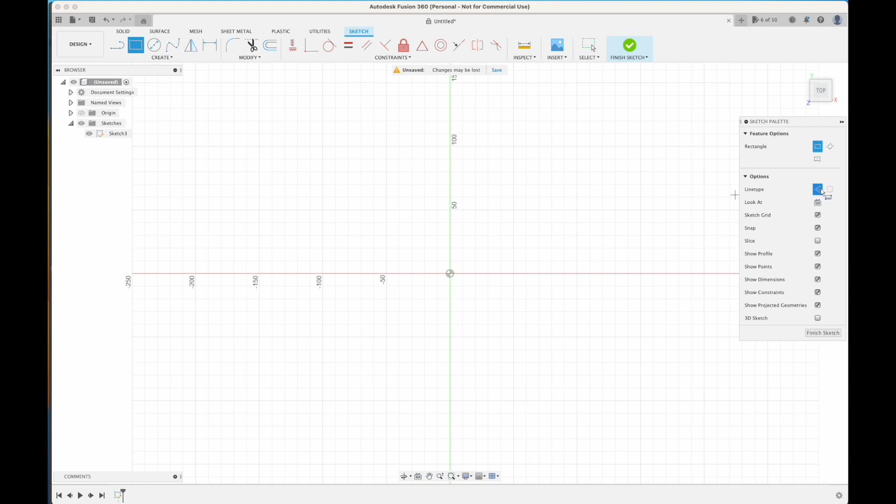Let's go ahead and start with a sketch, which you can create in the upper left corner. The way I generally start these out is I will create a rectangle on my canvas using a construction line, which means it's for reference only, and I will denote my build volume, which is 250 by 250 for a Bambu, and finish sketch. So I'm going to use this as a guide. This is going to be very helpful in a moment.

Next, I'm going to create a component. So we're going to go to Assemble, New Component. The reason to get into the habit of using components is it creates individual timelines and collections of bodies. So if you're creating assemblies, you would create multiple components, and in multiple components you can have multiple bodies and timelines, and it makes your organization a lot easier.

So let's call this N64. And you'll notice that the little radio button automatically switched to this N64:1. It adds that :1 automatically. And you'll notice that original sketch got a little opaque, and that's Fusion's way of telling us we're not working within that space right now, we're working within the N64 space.

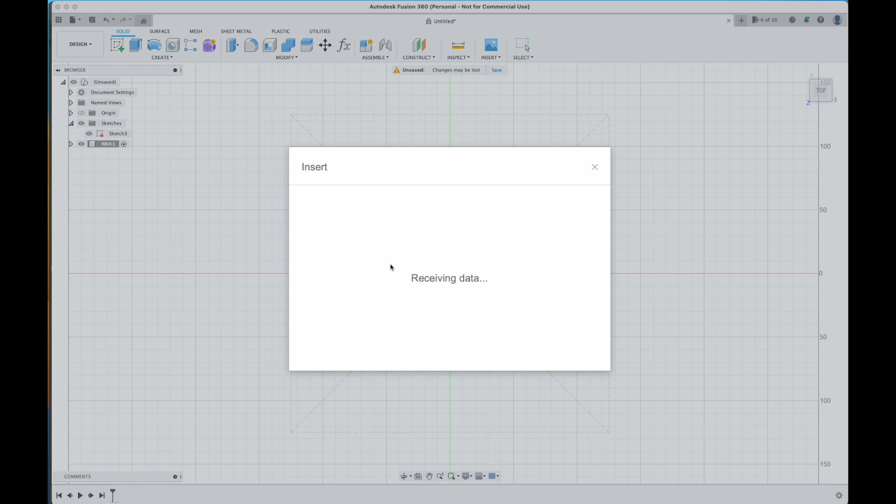Next, let's go Insert, SVG, Insert from Computer, Desktop. There's my SVG. It's going to ask me what plane. We want it on the top. And it's really big, and this is just because of the scale, I think it was in Adobe Illustrator. So what we're going to do here is kind of eyeball this. This is not an exact science.

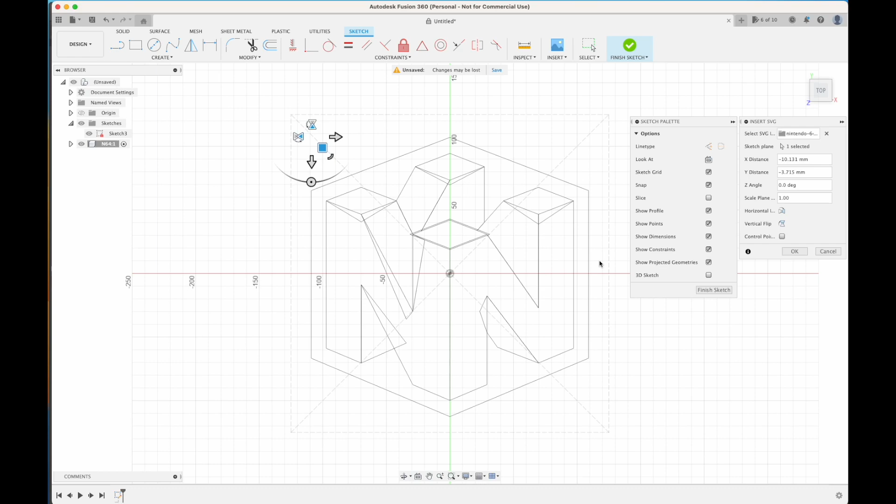What we do want to make sure of is we give adequate space around the edges for the brim, because this is a big flat object. Your slicer is going to add a brim to this. So I'm going to leave some ample space on the sides here, assuming that it's going to add a 5 to maybe even 10 millimeter width brim. Okay, so we're going to say okay, and now here's our sketch.

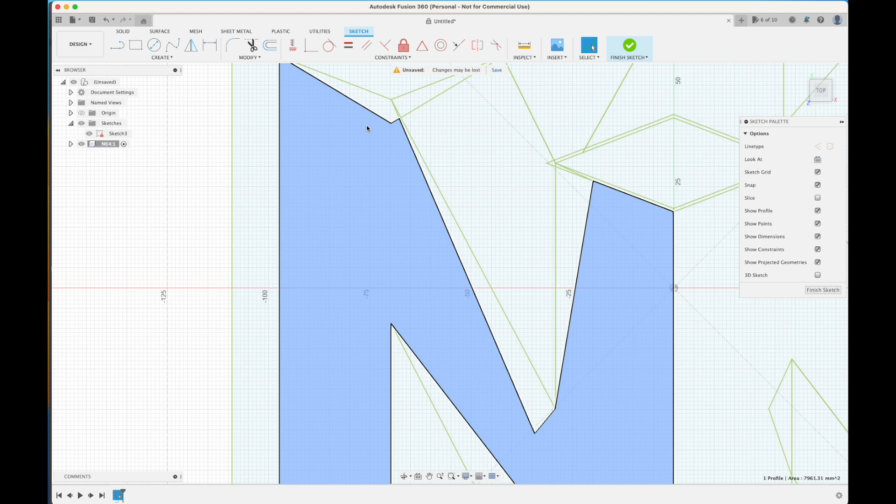Now we can start extruding these bodies. The way I generally do this is extrude the bodies based on color, and that can help us when we bring it all out and then bring it back into our slicer. So let's do the green stuff first. So here you can see how the lines are a little funky looking, and that's because I wanted to ensure that we have overlap with the surrounding objects, and you know there's going to be some weird things like this. We got to zoom in and get that.

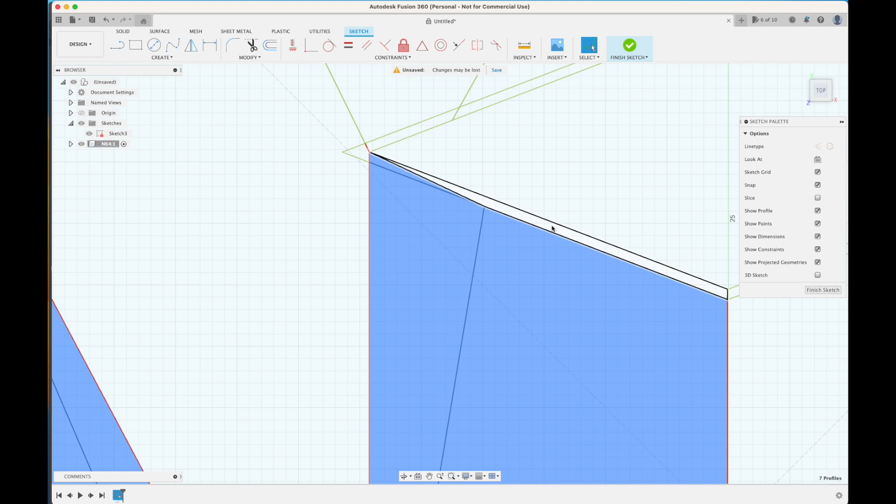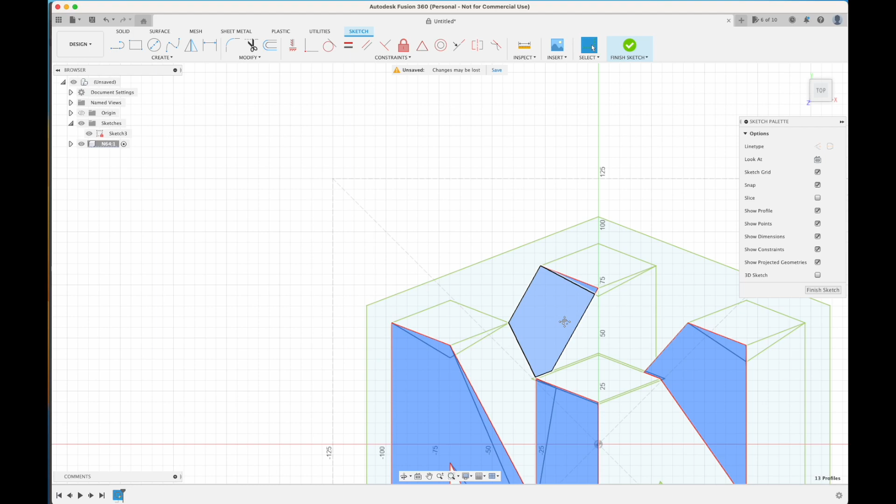Let's go like this, and we're going to get all of these pieces. Okay, that's one part of the, I guess we're going green. Sorry, not blue, we're going green. Just going to go with the flow here. Got that piece, and let's see, the last one is this kind of little ramp guy right there. Yep, okay. Make sure we got it all the way down here.

Now I'd like to preface this with, again, if this logo was constructed really well, I wouldn't have had to do these weird manipulations to it in Illustrator, but I didn't want to rebuild it because it's a pretty complicated logo. But this is how we can be scrappy and still get away with something.

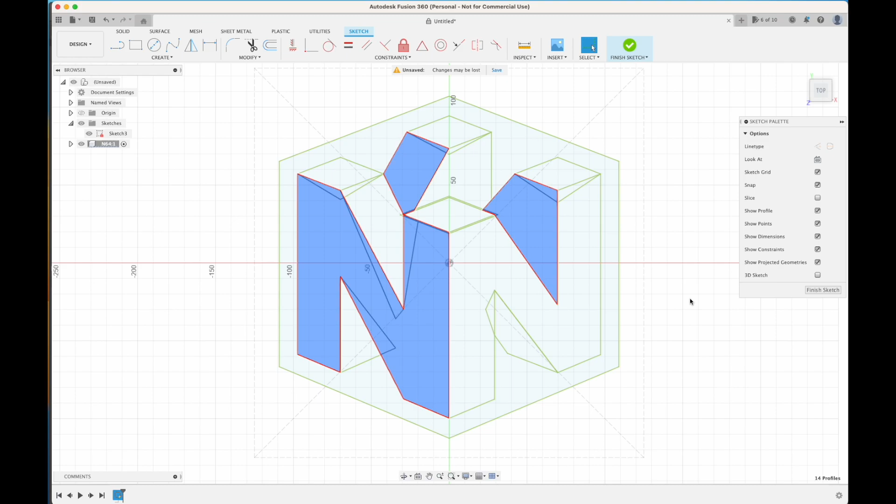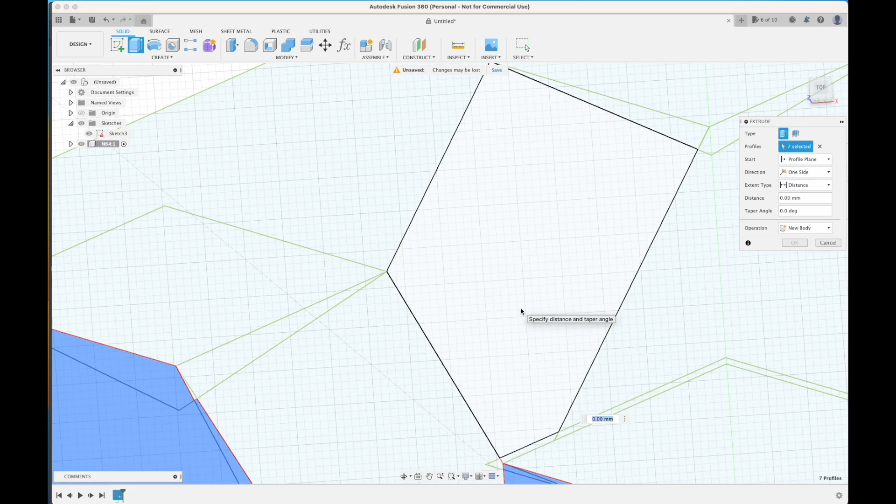Oh, and I noticed I'm still in sketch mode. Let's see here. If I hit E key, yeah, that's what I thought. Okay. I was in sketch mode and I needed to get out of sketch mode. So I got to do this again. Back where we are, I got the selection back again. Sorry about that. Now I already hit the E for extrude, and we're going to go 0.8. So we're going to give this a width of 0.8 millimeters.

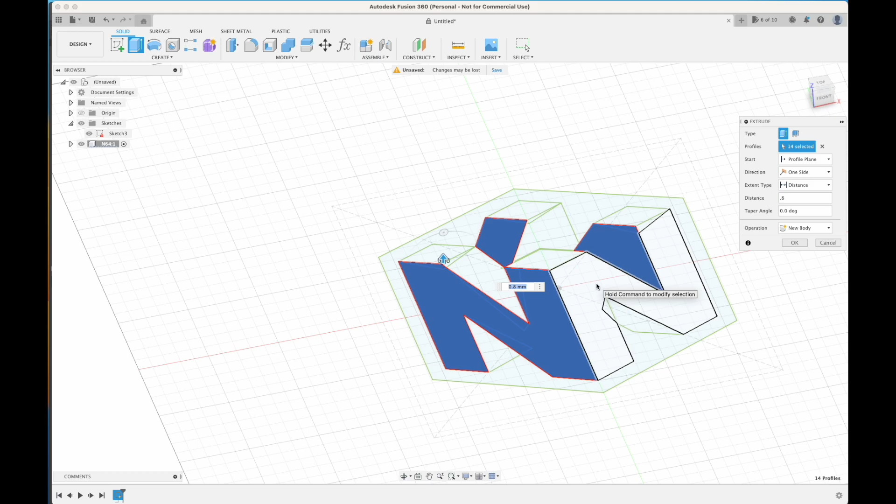You might be asking, why 0.8? What's the significance of 0.8? I have found that 0.8 is a good happy medium for diffusing LED light through normal filament, meaning not transparent filament or translucent, but normal, like opaque, if you will, filament.

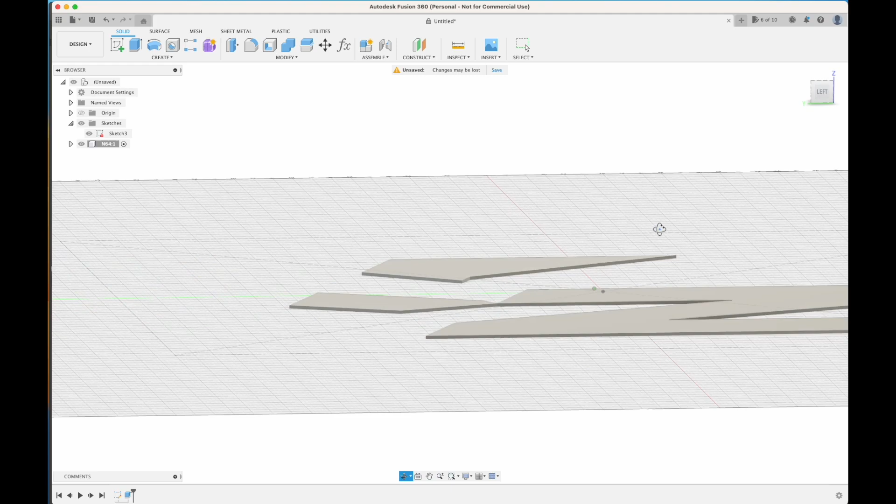Now, where the real craft comes in is depending on the color of the filament, you might want to do different thicknesses. For example, a normal royal blue will let a lot less light through, royal meaning this, than yellow. Yellow lets a lot more light through.

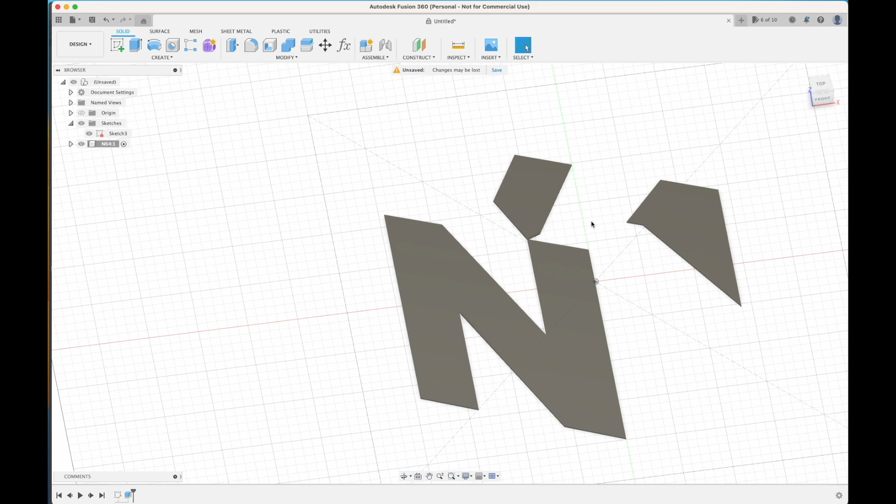So if we go 0.8 on yellow, we would only want to go like 0.6 on the blue and the green and probably the red because they're about similar color values. And that's how you can end up with really even lighting with different colors. And I'll show you a little trick here we can kind of mess with in Fusion to help that.

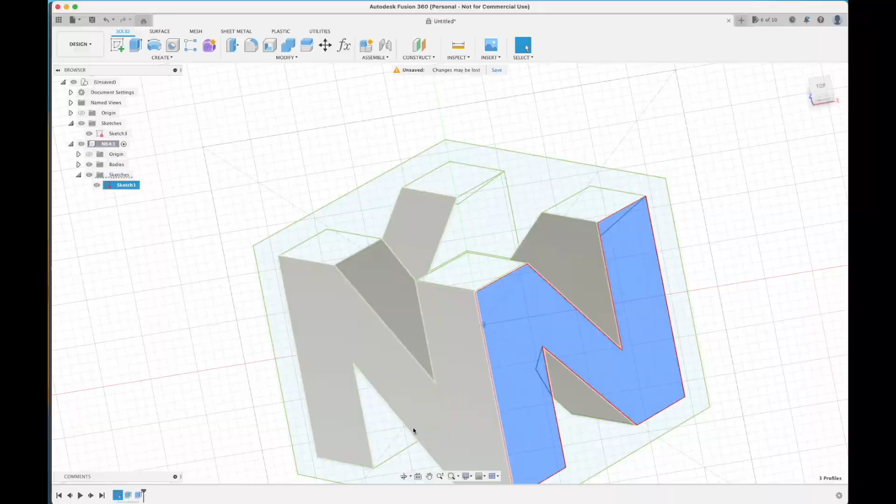All right, it turned our sketch off, which Fusion just does. And now I'm going to rinse and repeat, where I'm going to go select the colors and I'm going to extrude them so that we end up with our individual bodies inside of Fusion. Okay, so we've got all of our bodies. Now we could pause here for a moment and we could do some organization.

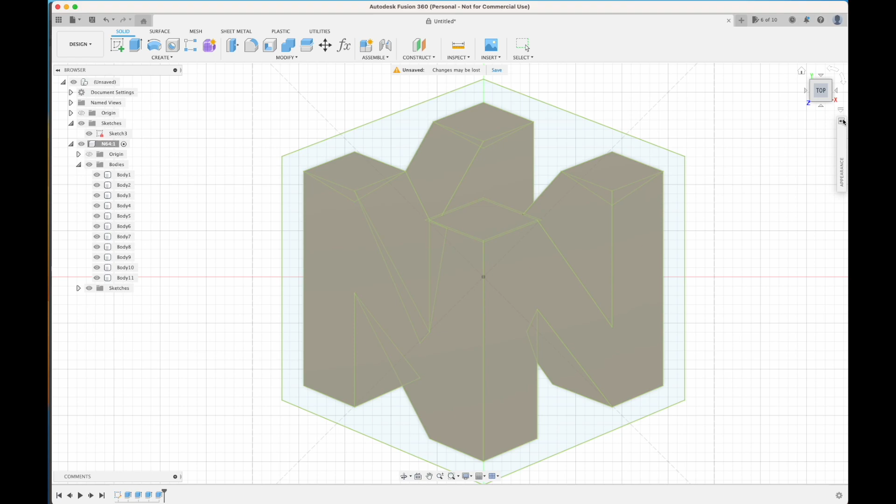And one of the things that also helps here a lot is to colorize this. You can hit the A key and bring up appearance, go down to plastic, and just drag a color over. Double click that color, and in this case I believe that is blue. So we'll change this to a royal blue right there. And let's drag that to the other blue faces, which is that one and this one. Right click to duplicate, change it to red. And let's drag this to the red ones.

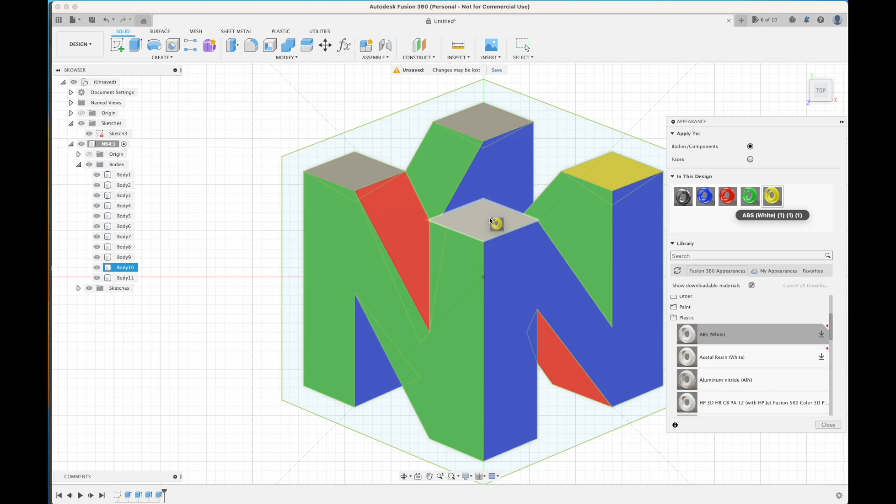Great, right click, duplicate, green. It's totally not the right green, but that's easy to fix. Let's go move this around like there, okay? And right click, duplicate, yellow. Let's move it over to yellow. Done. Let's drag it onto our tops here. Cool. All right, A key to hide. Actually, sorry, there you go.

Okay, so that's helpful. And if you want to as well, you could go over here to bodies, right click, and say new group, and you could say something like green. And this will help you further organize your bodies. This will also help us when we go to export, because we want to export the colors together. It's just going to be a lot easier for us when we come into the slicer. So I'm going to do the fast forward mode here, and I'm going to organize these things.

All right, welcome back. So we got our folders here. We've got green, blue, yellow, and red. And we can toggle these on and off.

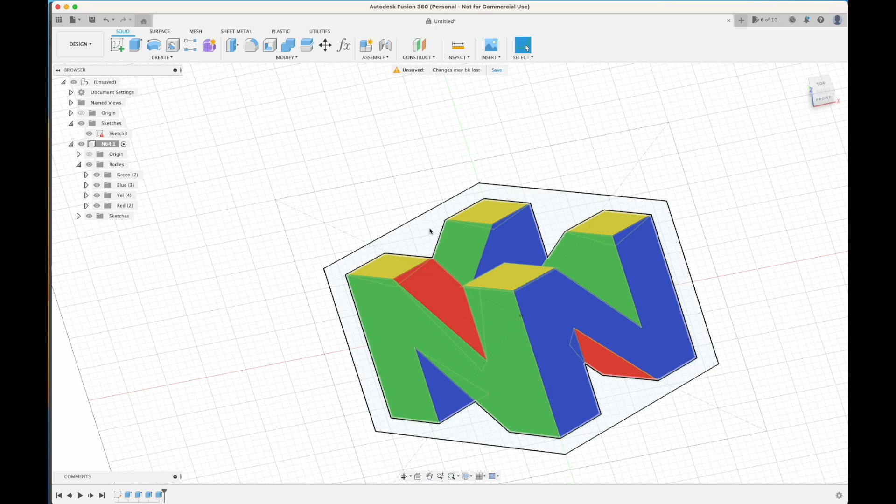Great. Okay, last but not least, we need to make our face complete, and then we need to create the backside, and we also need to create our wall. So this is an easy one. We're gonna take the remaining area and we're gonna do E to extrude. Now, again, depending on what color you're using here, and you want to make sure light doesn't go through, you might want this to be a little thicker than the colors that are for the actual logo.

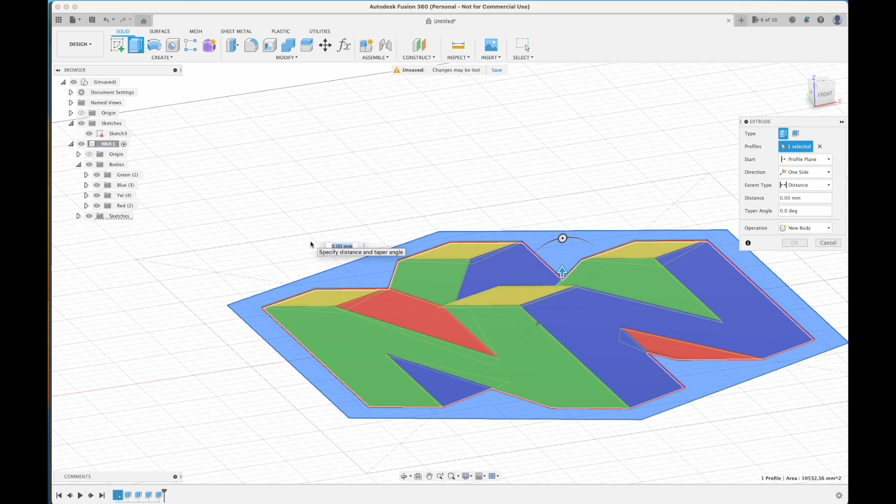Let's assume you're using black. 1 millimeter should be enough, but to be safe, you could do like 1.4, actually, yeah, let's do like 1.6. Okay. And you'll notice what's happening here is because we're extruding in the upward direction, it's thicker than our other pieces, and something weird just happened.

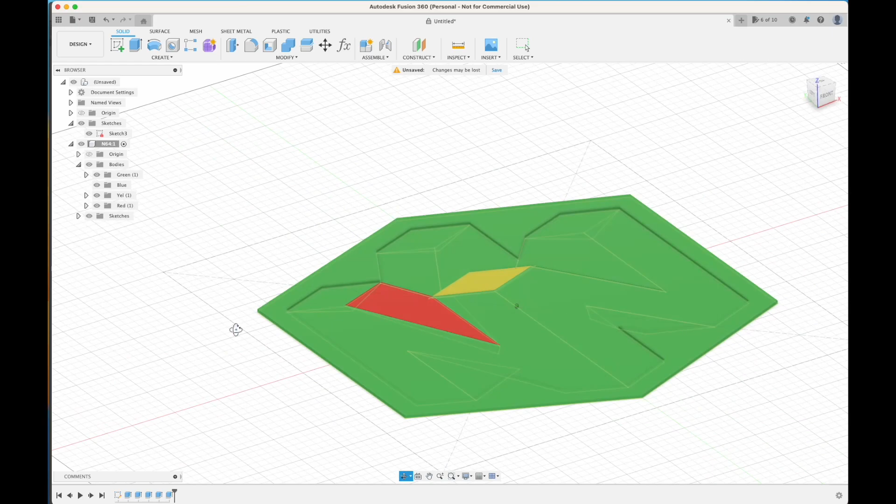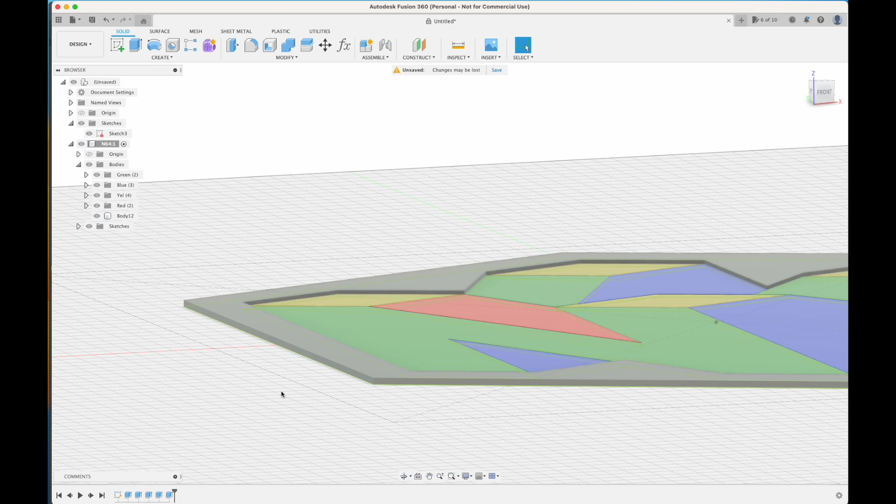Well, you know what it was is over here. See how the operation was to join? We want this to be new body like we were doing before, and there we go. Now we got our new body, but we got to fix the distance that it's extruding, and there's multiple ways to do this. I probably should have just extruded everything down to begin with, and you know what, that's an easy fix.

Let's do that. And while we're at it, let's add some user parameters, and this is magic. This will make updating your design in the future a lot easier. I know that word sounds very daunting, but let me show you what happens here. So we're going to go up and hit this FX button, and you have to be under the solid tab to see it. You can also customize this toolbar.

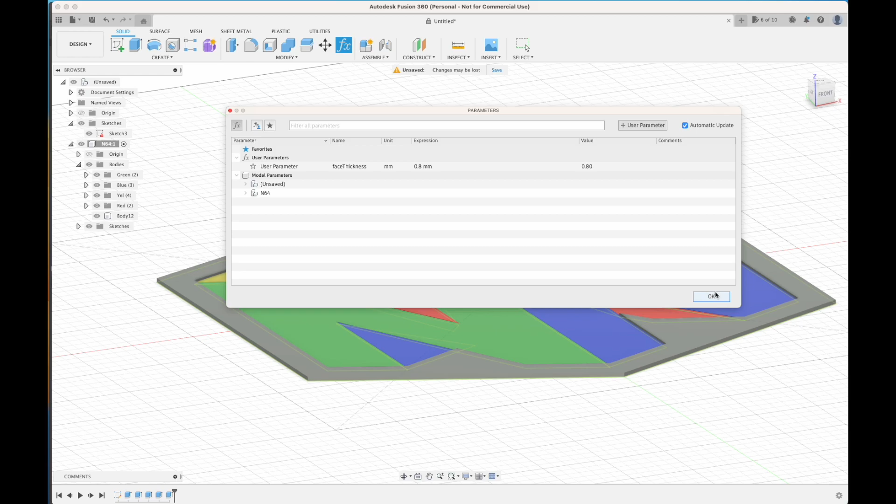Let's go add user parameter, and we're just going to call this face thickness. And remember, we used 0.8. Okay, so face thickness 0.8. That's all we're going to do for now. Let's go back and edit our extrusions, and rather than using a fixed value, we're going to use minus because we want everything to go down, minus face thickness.

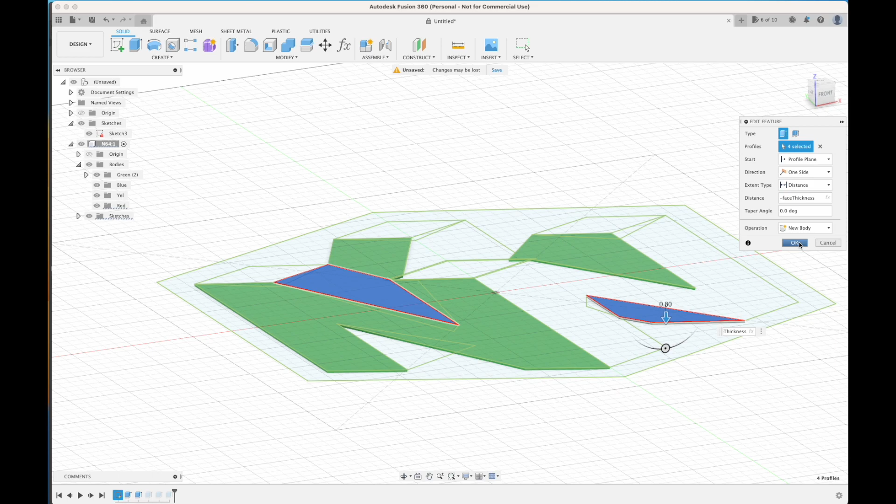Okay. And I bet you're thinking right now, oh, I see what's going on. So if you wanted to change the thickness of everything, you could just change that value. Exactly. And if you want to make certain thicknesses different, but still have a solid baseline value, this is how you do it. So we're going to go through here, minus face thickness, and update all of our faces here. Okay, minus face thickness, great.

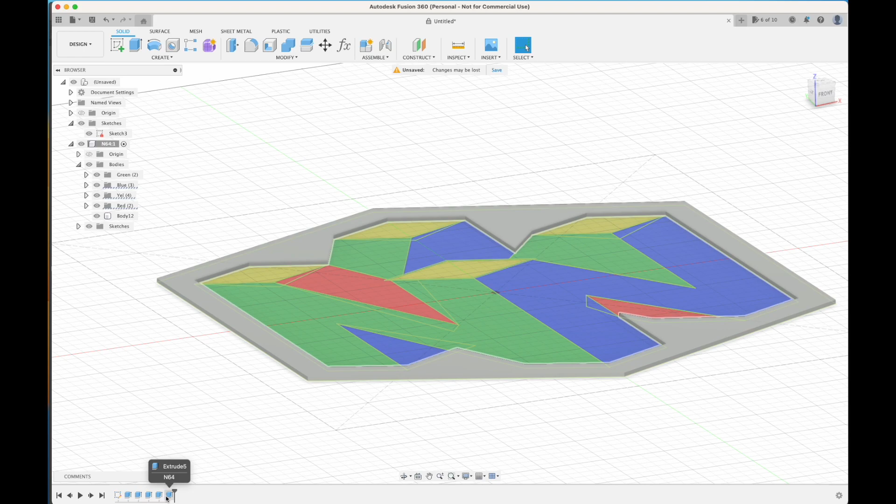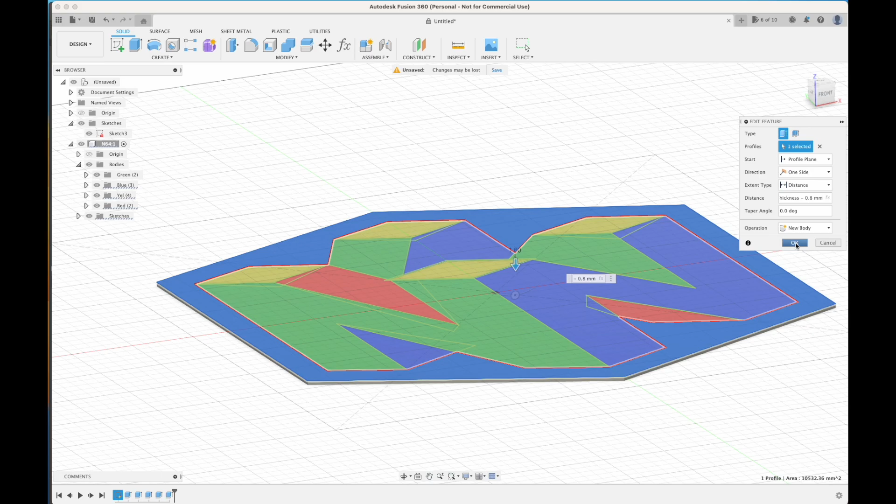And last but not least, this one we wanted to be slightly larger, so we could go minus face thickness, which was 0.8, and we could go like plus 0.8. Oh, no, we're going down, sorry. So minus 0.8, new body, okay. Sweet. You can see looking at the bottom of it, it's a little taller, which is what we want.

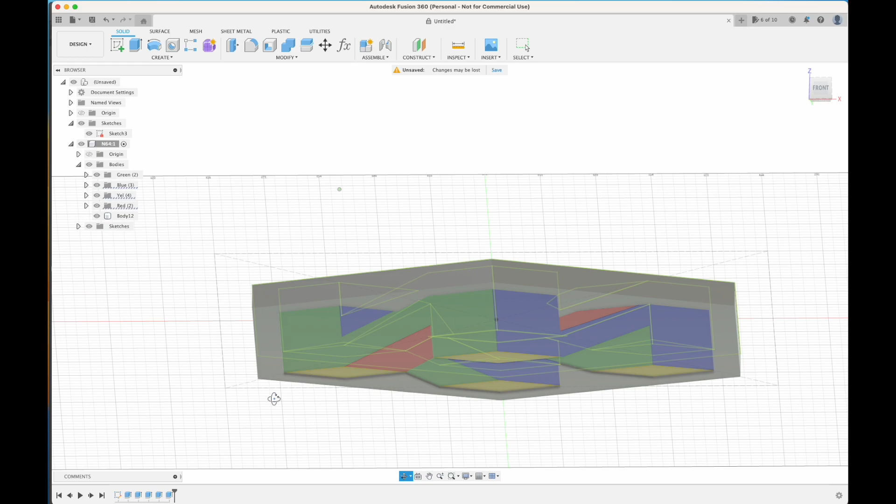And now the other thing we can do, check this out. If we go up to user parameters now and we change this to something crazy like 10, you'll notice that everything changed as well, which is super awesome.

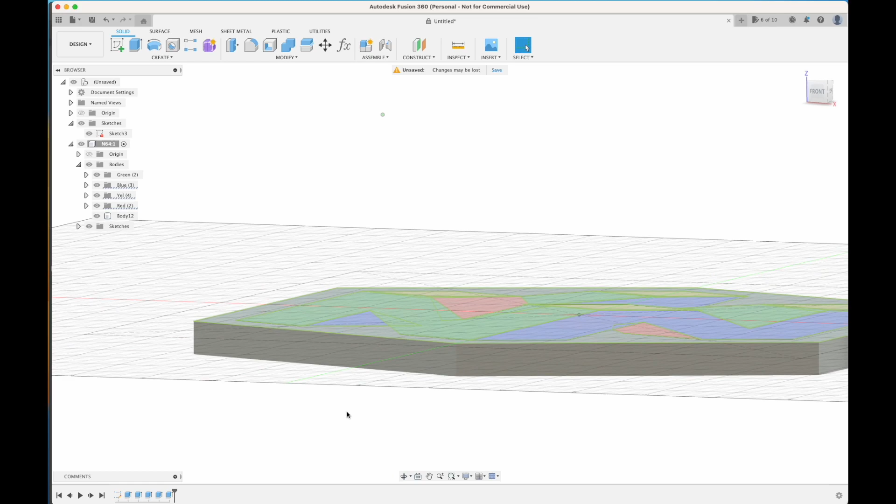And now if we wanted to be real cool about it, instead of using -0.8, we would use a multiplier or some sort of expression to make this a ratio so that this height is always a ratio of the colored items. But anyways, we don't need to get into all of that. Okay. That's the colors. Hopefully you're able to follow with me there and see what was going on.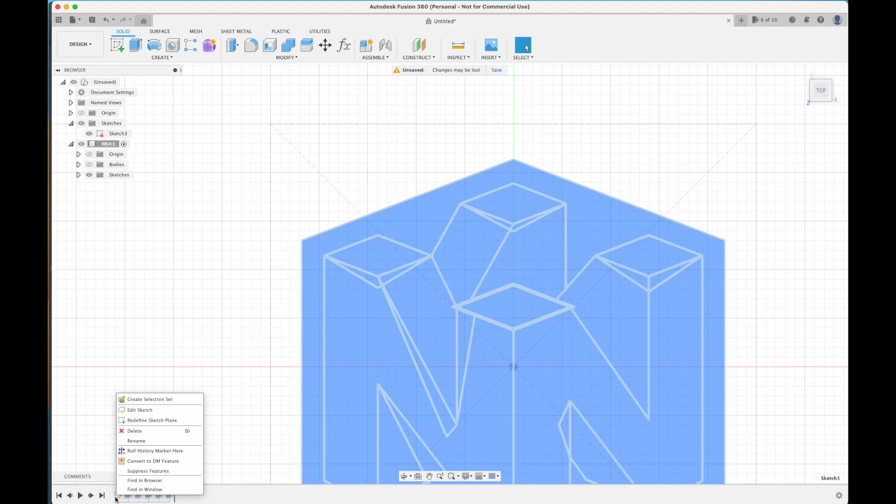And now we need to create our actual box for this. So we're going to turn off the bodies for the moment. We're going to go to our top view, right click and edit our sketch. We're going to offset, hitting the O key, this outer pentagon shape 4 millimeters to give us some thickness. Assuming you're using black, you don't need that much thickness on the walls to prevent light from going through.

If you're using a color like red or something else, you probably need this to be a little thicker, or make these walls 100% infill. Yeah, that'll work no matter what, because our bottom layers are super thin, so it doesn't matter if we set the whole model to 100% infill anyways.

Okay, so I digress. 4 millimeters. Okay, now we're going to offset slightly more from that one more time. And this is going to give us our tolerance to kind of have an inset or a recess so we can fit the back plate on, and it's going to be perfectly aligned. 0.2 tends to be a good range to slide pieces together.

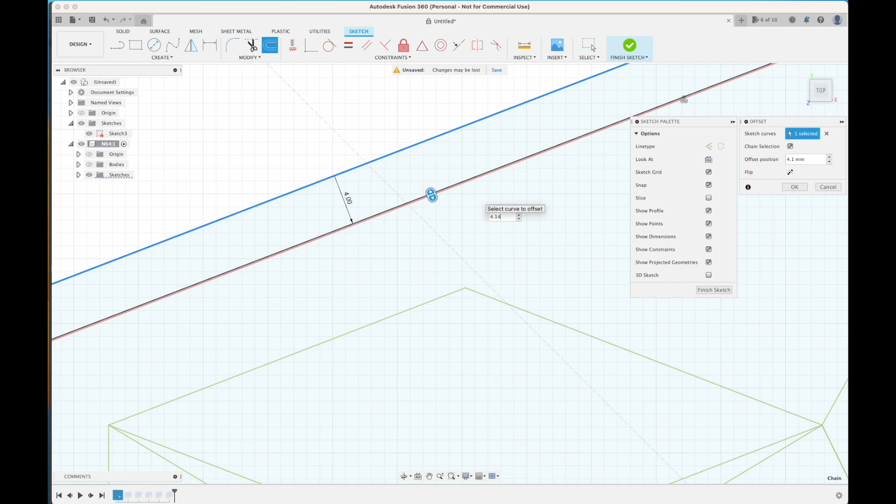If you want some tension, which I actually haven't done with the Bambu, I'm going to assume you need to go like 4, I don't know, like 4.14 maybe, or like 4.12, something around there. I'm just gonna go 4.14. I'm not super worried. I'm just gonna super glue this thing onto the back.

The other thing you could do if you want to get real fancy is you could create recesses and screw holes, which I've done before in the past, but we're not going full-blown engineering here. We're just trying to make a Nintendo 64 light, right? Yeah, so that's for a different time and a different place.

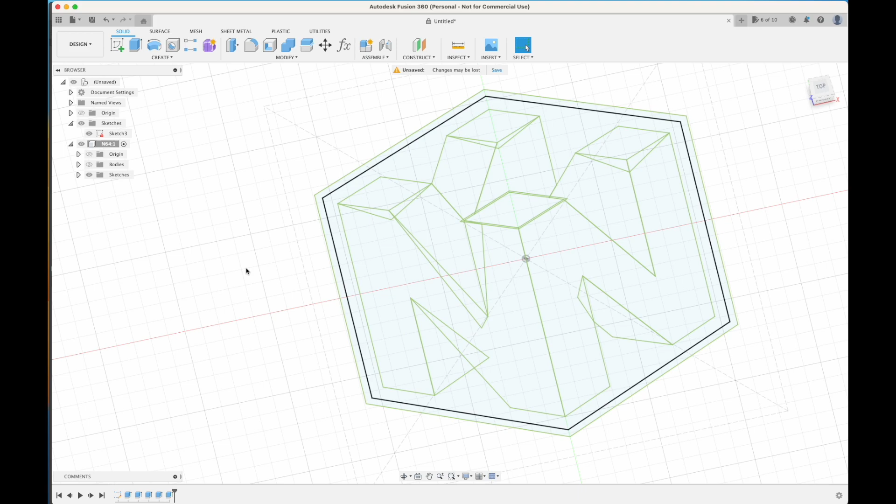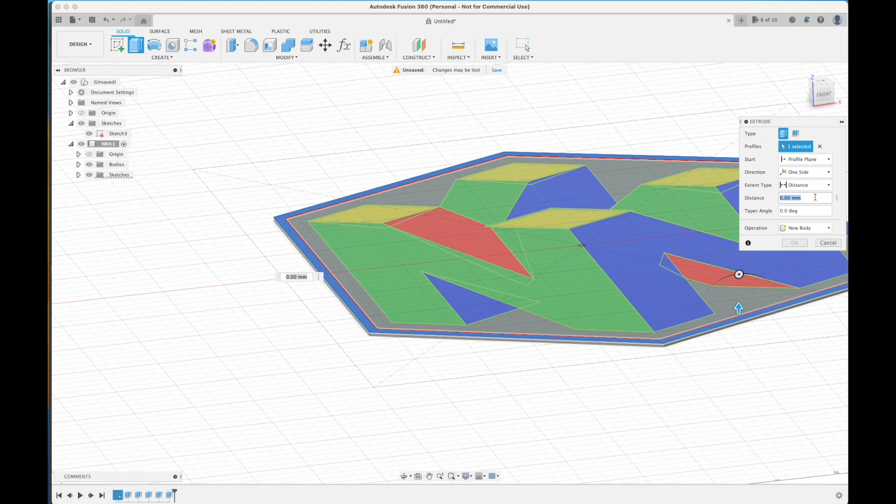Okay, now that we've got our additional sketches laid down, let's create our, I guess you'd call it our brim, right? Okay, so we're going to grab that area right there. We can turn our bodies back on. Now we're going to do another extrude, E to extrude, and we're going to go down 40 millimeters and minus. Let's go join this time because we want to join this to that gray area.

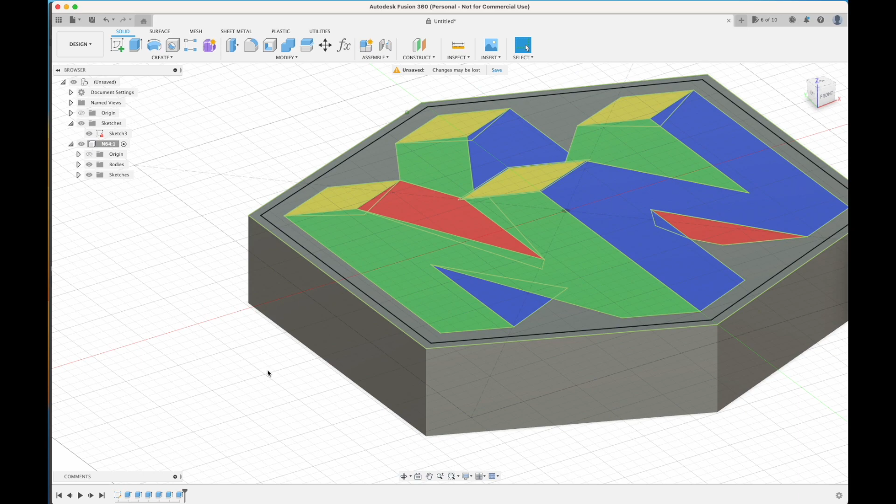I have noticed that 40 millimeters is a good amount of distance to get a really good amount of diffusion. You don't really need to go much thicker than that. And you can even go a little bit thinner on this one because the LEDs are, in this case, going to be nicely dispersed around the edges just because of the shape of this object. But 40 millimeters is a good middle ground. You're pretty safe there.

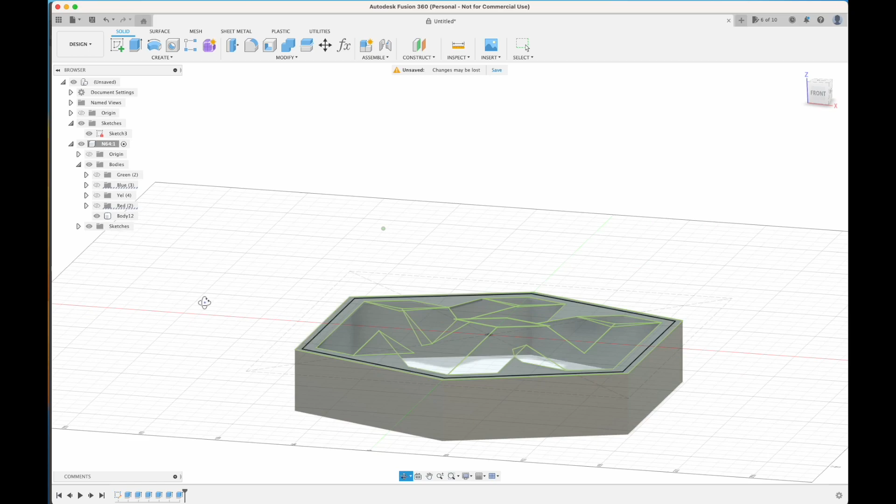So let's take a look at our bodies to see what just happened. If I turn off green and blue and yellow and red, you'll see this body now. That's what we have. So that's kind of our frame, and that's perfect. That's totally what we want. And when we print this, remember, it's all going to be fused together. It's all going to be one nice big flat face.

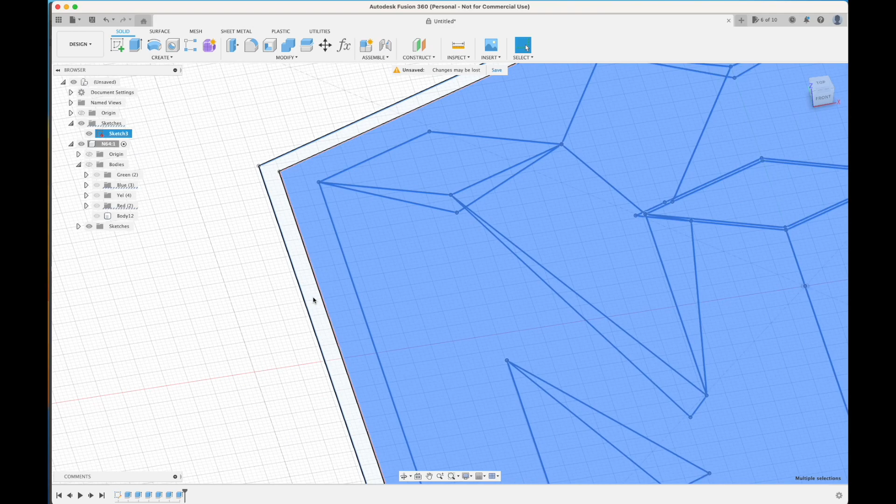All right, on to the back. Let's create our back piece. We're going to turn the bodies off again. We're going to select everything, but we're going to deselect the outermost and one step in. And oh, you know what? Actually, I'm sorry. We need to select all of this. I'm getting ahead of myself. We need to create the bottom, just the flat backside. So that's what we're going to do here.

Okay, so got it all selected. Let's turn our bodies back on. E to extrude. Now we want to offset this because we want to move it down so that it matches up with our bottom edge. And the offset here, remember, we offset 40 millimeters before. So we're going to need to offset at least 41. So we're going to go minus 41. I think I got this right. And we only need our bottom face to be like a millimeter thick.

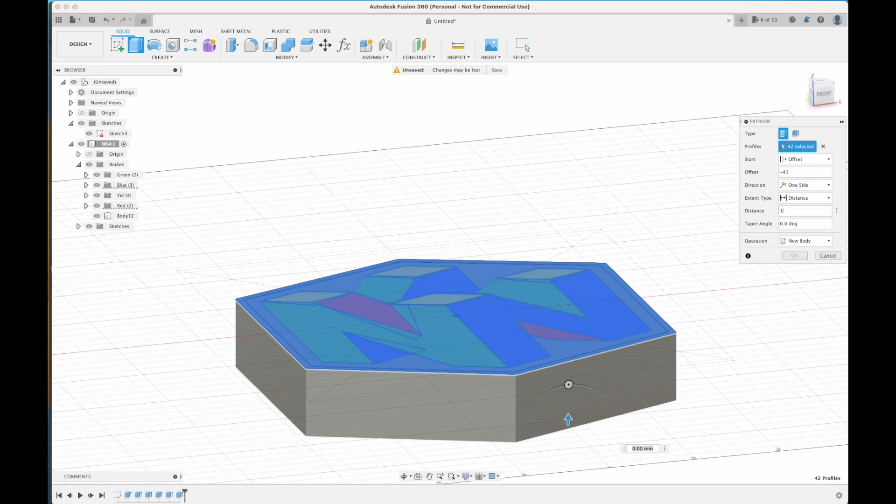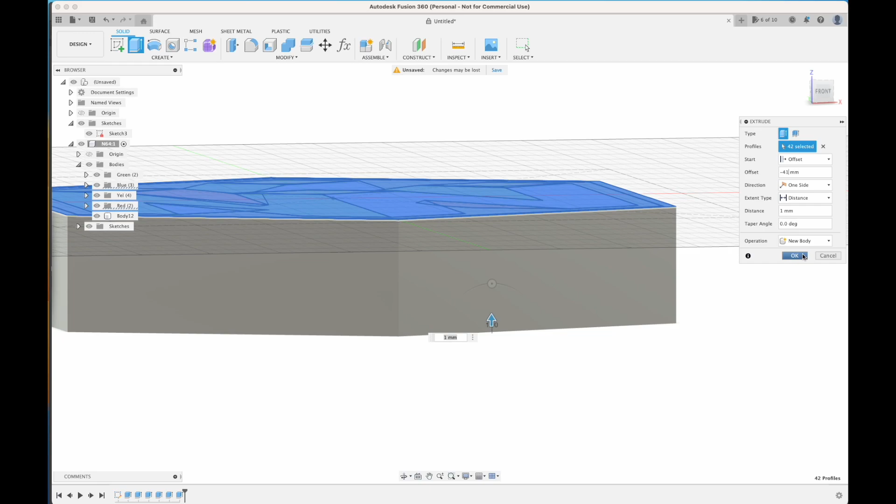Let's see where we're at here. And we want this to be new body. Okay. I need to go 42, I believe, because of the face thickness. Oh no, I was in the right place before. You can see it just popped it down. So we're going to do 41. So what this is doing is it's offsetting the face down and then it's extruding it. This is great about Fusion 360 so that you can create these visual objects. And if we turn off that, there you go. You can see our bottom.

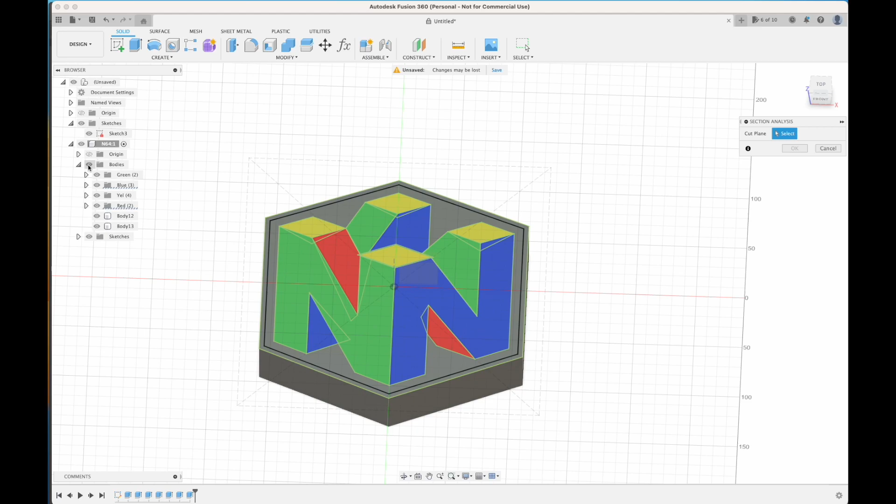Something else that can be very helpful as we're working through this is using section analysis. And this is really cool. If you go up to Inspect, go down to Section Analysis, it's going to ask you where you want to place this section analysis. Let's turn off our bodies, turn off our sketch, and it's asking you what plane you want to slice this on. I'm going to slice it on the Z plane, and hit OK. And it looks like nothing happened, but if we turn our bodies back on, check that out.

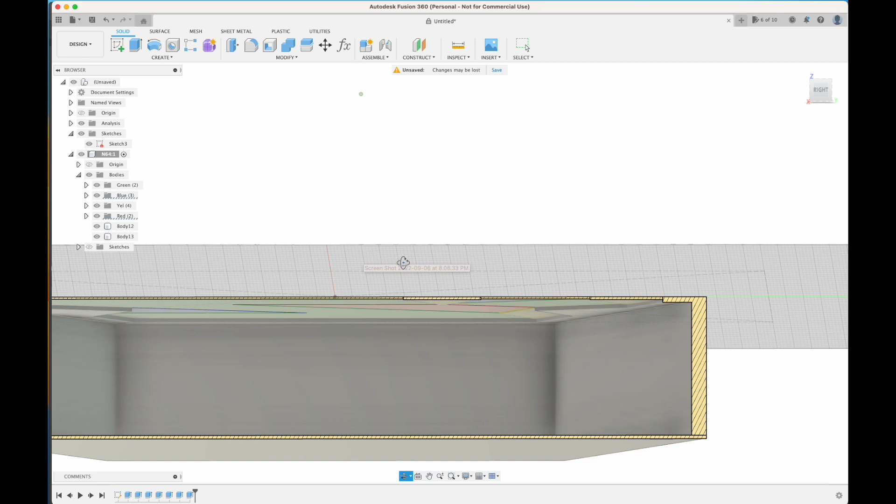So it's slicing through our bodies, and now you can see our little subtle thickness differences where the yellows are a little thicker and the others are all kind of the same width, being a little thinner, and you can see the face thickness is slightly different. And here you can see, great, our bottom face is matching up where we want it. So I'm going to leave section analysis on for the moment.

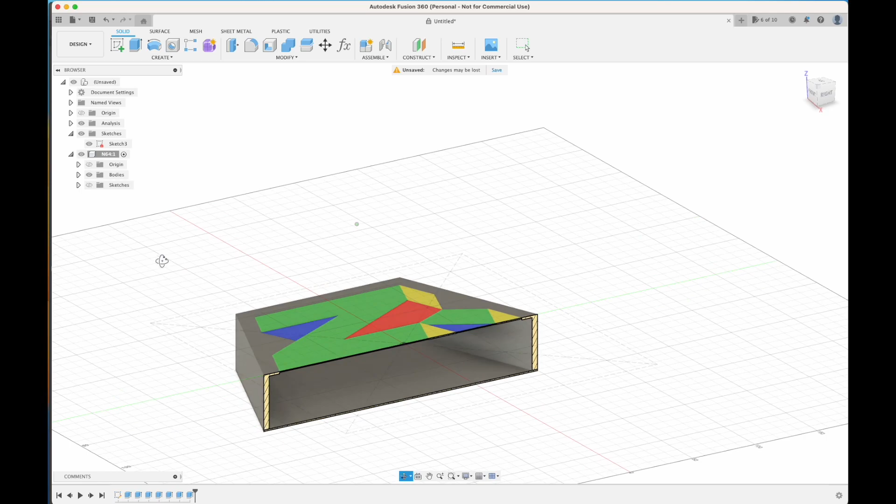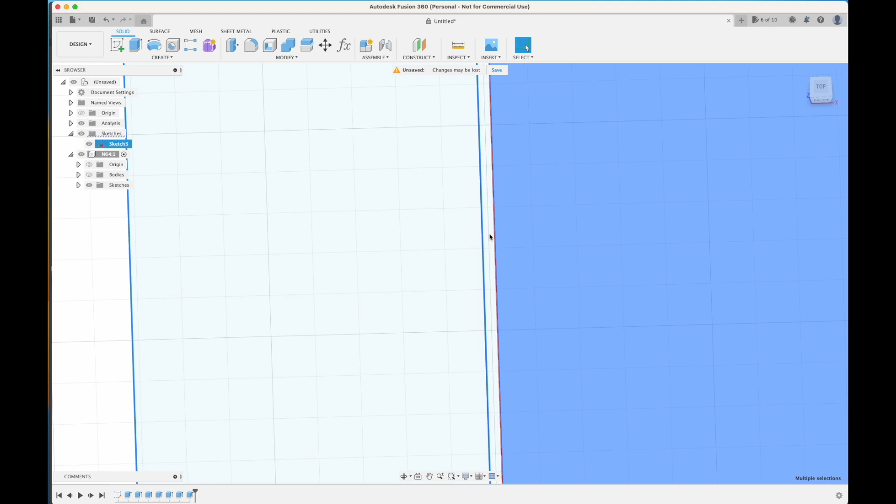And now I want to create a little bit of a lip down here so that we can fit this bottom piece into our side nicely so it fits together perfectly. Let's turn off our bodies, turn our sketches back on. Here's what we're going to do. We're going to grab everything. We're going to deselect that area and this area. And remember, this is like 0.12 millimeters smaller than our casing edge. So we're going to do the same thing here.

We're going to turn our bodies back on, E to extrude, and we're going to go offset again. We need to offset it. We're going to go minus 40. I think we only need to go minus 40 in this case. And then the distance, we're going to go minus 1, and you'll see what's happening. Okay, it's defaulting to cut. We want to go join, and I think I know what I did here. I think I went a little too far. We're going to go 39. Okay, there we go. And you can see we've got a little gap in there.

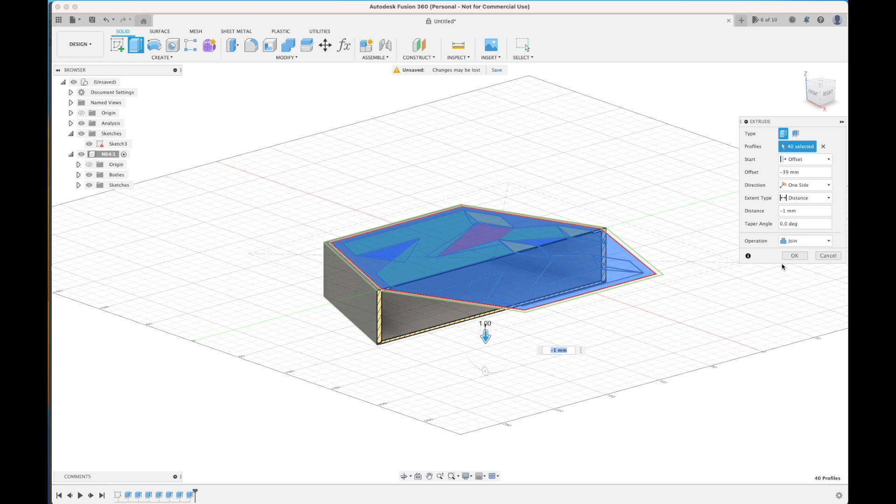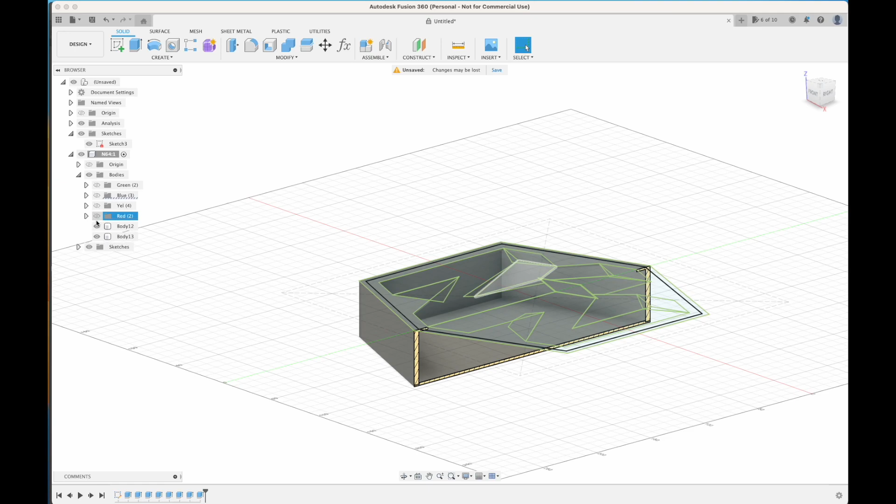That's perfect. That's what we want, so that we can fit this back plate onto the back of our light box. And in this case, you'll see here that it's set to join. That's what we want, and it's far enough away from the outer wall that it won't join with that. It's only going to join with the bottom. So let's go OK. Nice. Now let's check it out. Let's go to our bodies, turn off some of this stuff. And there we go. There's our nice back plate with a lip. We can fit it on perfect, and it should assemble nicely.

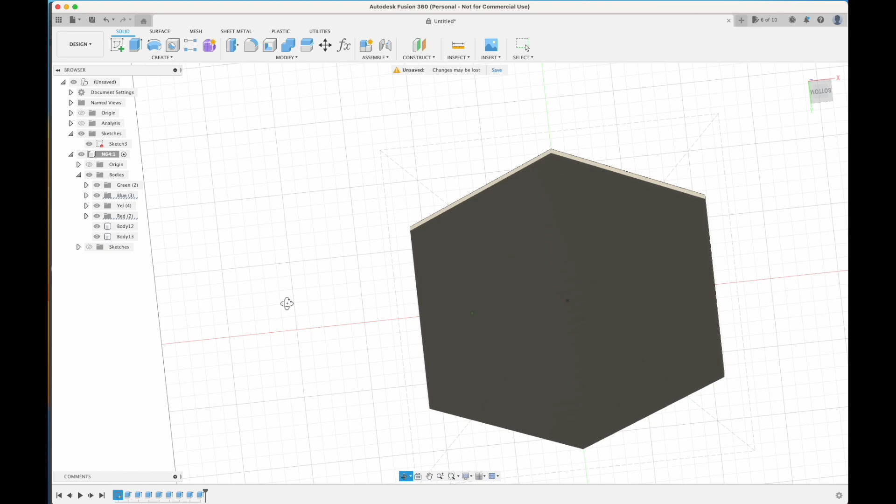All right, so one last thing. Let's go to the back. So we're going to go bottom. And I actually want it to be this way. Bottom, right click, and this is how you sketch on faces. Create sketch. Okay, so now we're on the back side. We want to have a little hole here for a cord. And you could also make a hole for a power switch if you wanted to. Whole other slew of things you could do.

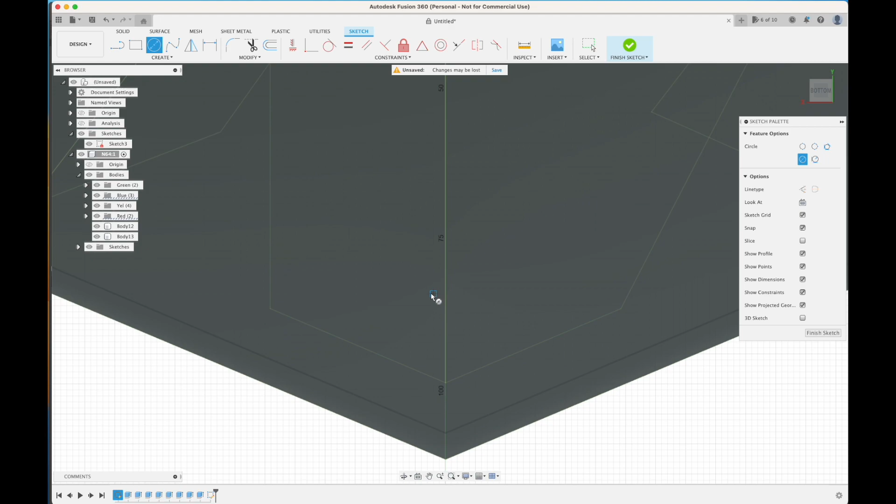Let's go ahead and just make a hole for a USB cable. I think if we make like a 3mm hole, that should do the trick. So let's make it 3.2 millimeters. Great. And we're going to grab it, E to extrude. We're going to extrude it down, and cut is what we want. Great. We got our little hole there for our USB cable.

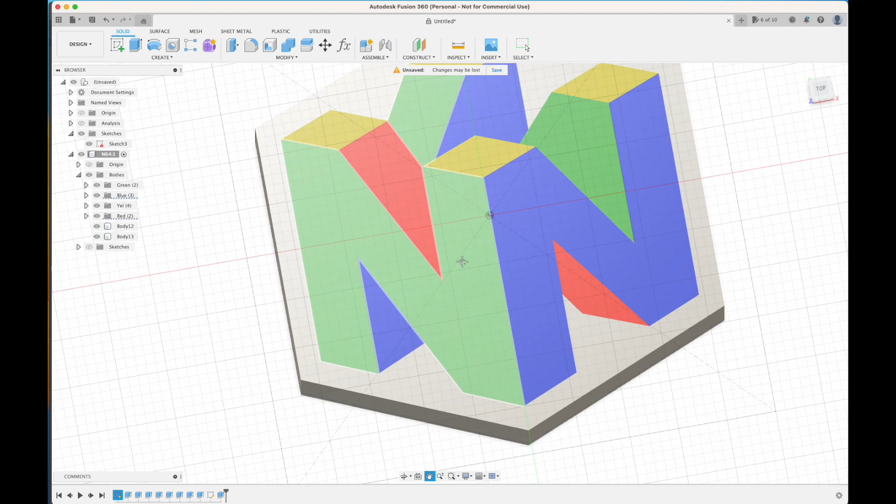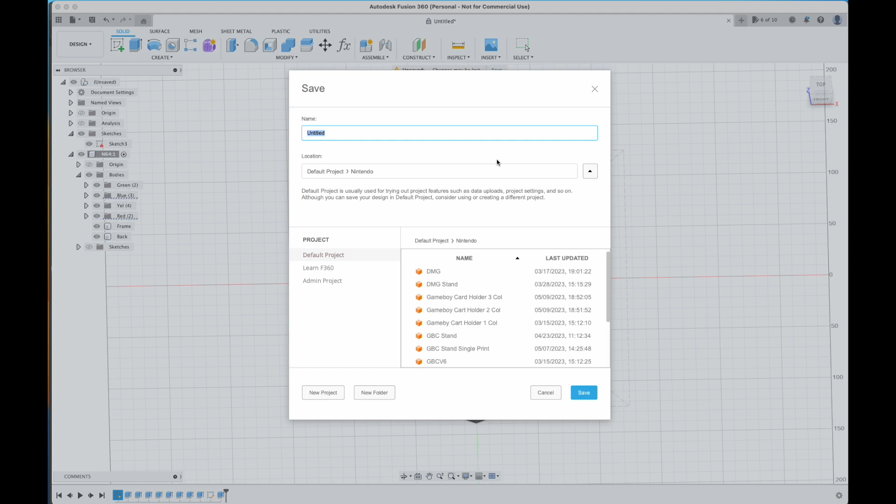All right. Next, let's bring this over into our slicer. We're pretty much done here. I'm going to rename this as the frame. I'm going to rename this as our back. And now we get to the point in which we are going to export. I probably should have saved this. N64, please save your work. I should have saved this in the beginning. If this had crashed, this all would have just gone bye-bye.

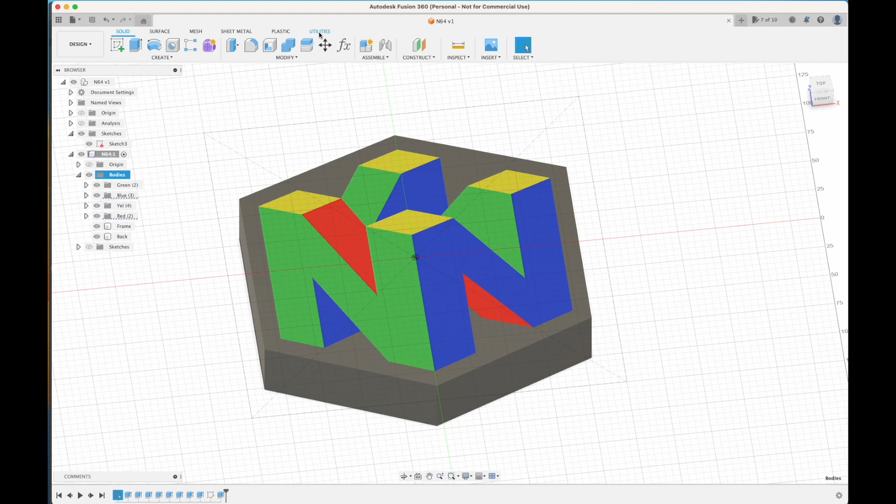All right, here's how we do this. You could export all of this stuff as one file and try and bring it in, but that works for smaller models. This one, we're going to export in groups. And what I have found works best for this is to go over to the Utilities tab, and you see there's this 3D print. So I'm going to turn off everything, and we're going to start with just the green.

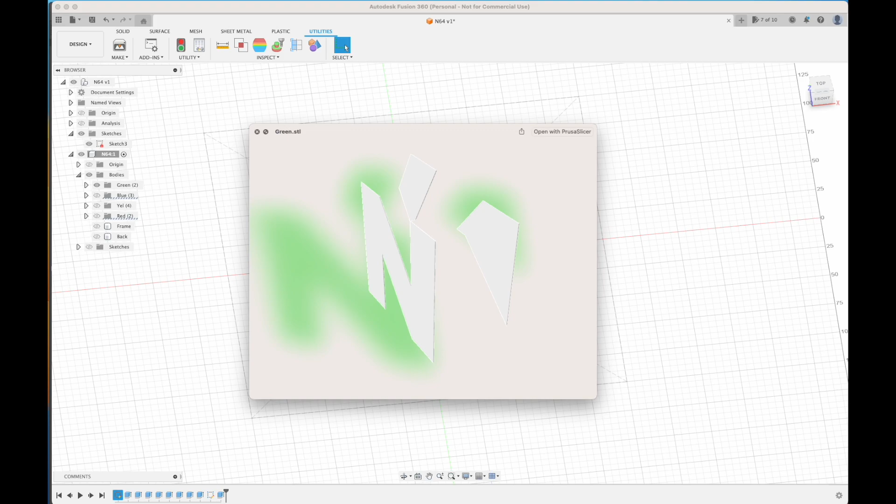So if I go Make, and I say STL, yes, yes, yes, OK, save it to the desktop. I'm going to call this green. Save it to my desktop. And if I preview it, yep, there it is. That's our green pieces. I'm going to continue to do this. Let's do the fast forward thing.

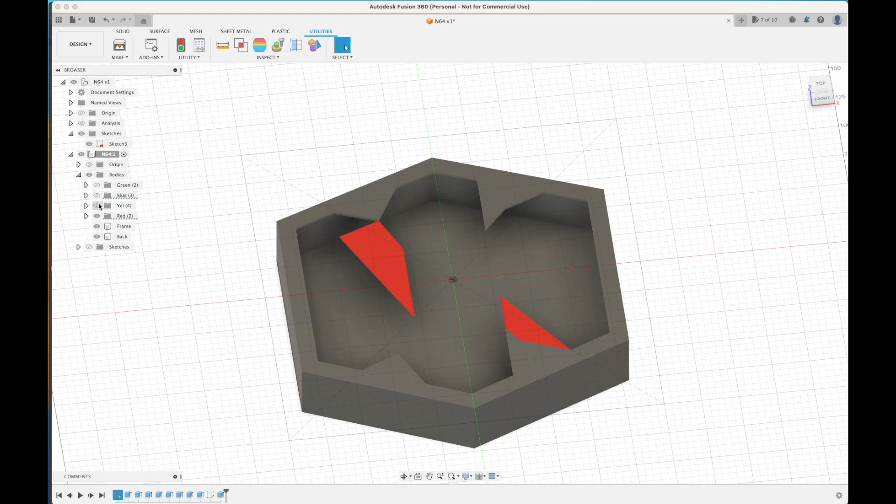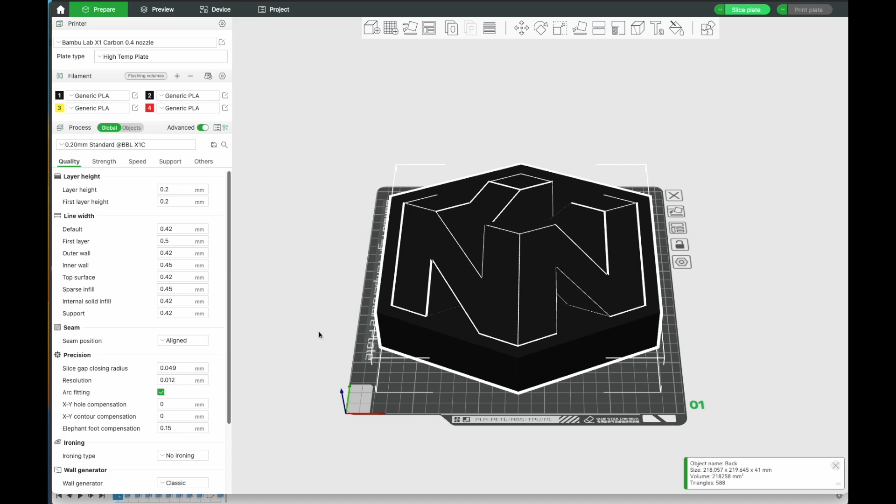All right, welcome back. We exported everything. Let's go over to Bambu Slicer. All right, here we are in the slicer. And what I'm going to do is grab all the files that are on my desktop. There's 1, 2, 3, 4, 5, 6 of them. I'm going to grab them and drag them all in. And it's going to ask me, is this a multi-part assembly? Yes it is. And there we go. We got all of our parts in here.

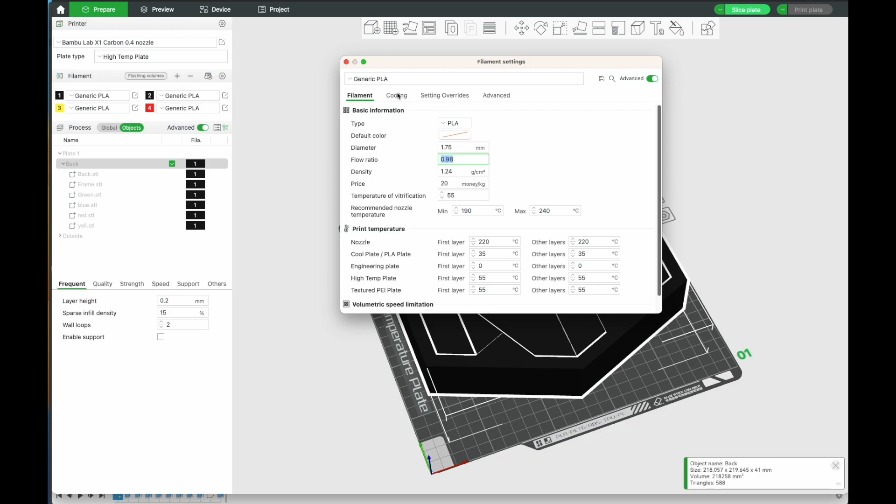And now what we can do is go over to objects in our left panel and start colorizing these things. Now my colors up here are not exactly correct, but you get the idea. Let me just temporarily change some of these. Where in the world? I'm trying to remember where you change the colors for these things. There we go. Okay, let's make that one green for the moment. Let's make this one blue.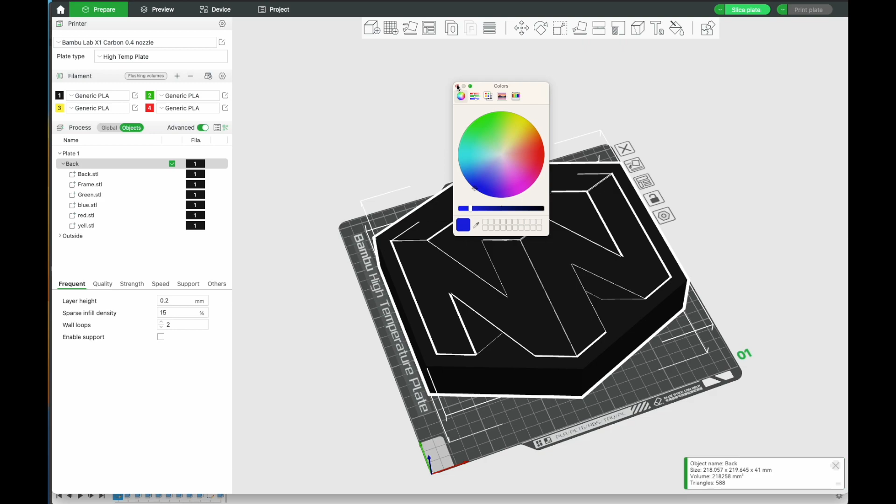And like I said, I don't have an additional AMS, so I'm going to have to kind of wing this one. All right, so the back, let's do the yellow. We want it to be slot 3, so I just hit number 3. The red, we want to be slot 4. The blue, we want to be slot 1. Green, 2. The frame, let's make the frame maybe red, I guess, in my case. I don't know. And the back, we want that to be red as well.

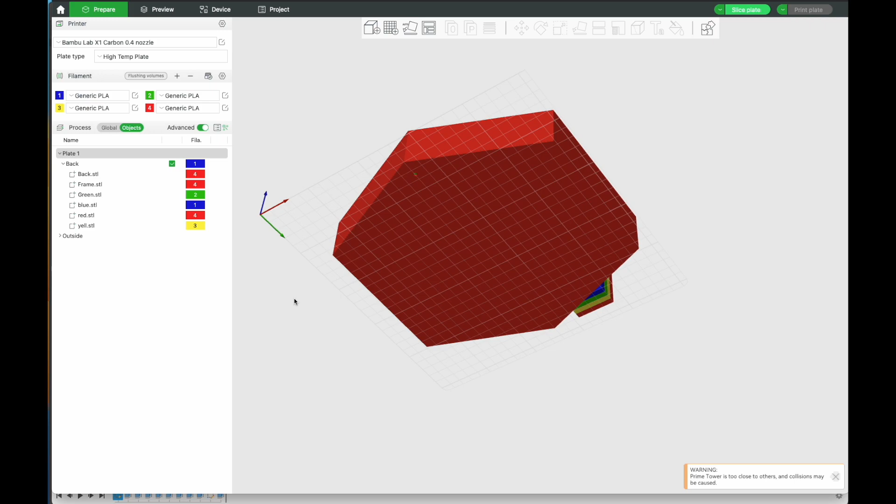And you want to print this face down, obviously. So if you just hit auto orient, it's pretty good. Nope, it didn't do it. Okay, so we're going to select this and rotate it along the x-axis 180. Okay, now it's face down.

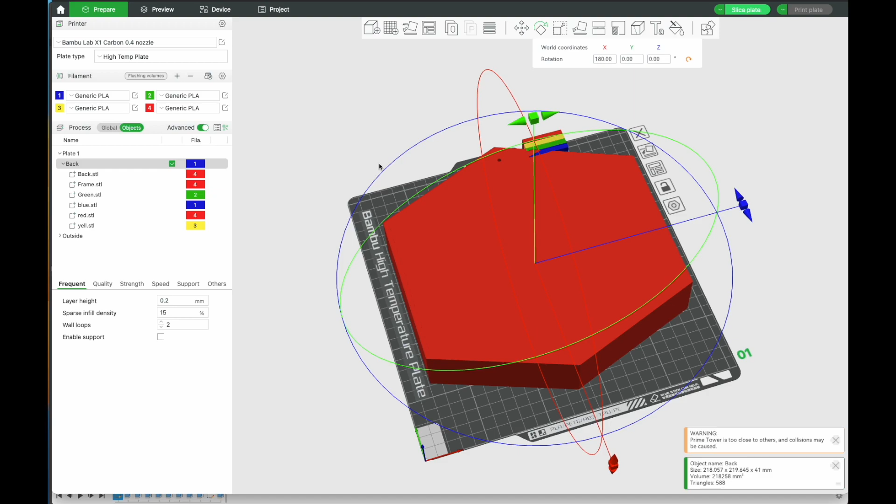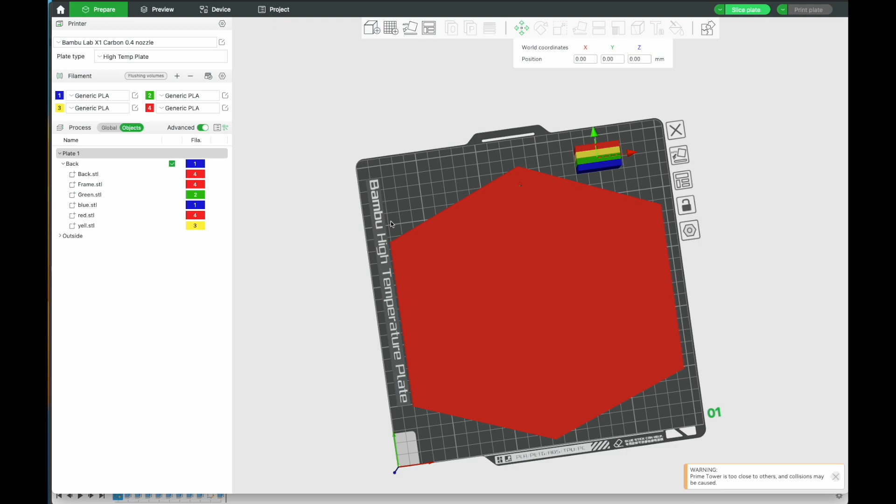And our prime tower, as you can see, is in the way. So we can try and just go up here and go arrange. Yeah, that's not working. So let's move our entire object down here. Let's move our prime tower over there. Okay. And let's just slice it and see what happens. Yep, so there we go. You can see it added the brim. So it's a good thing we accounted for that earlier in the Fusion file.

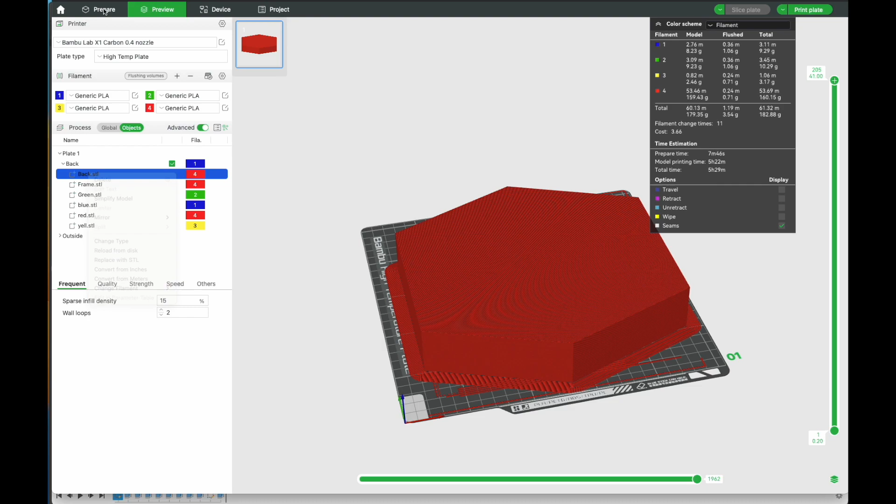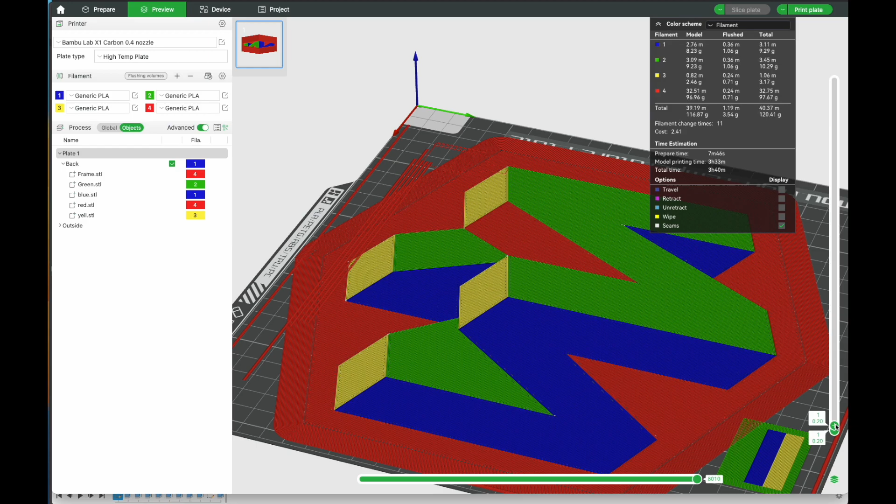So let's play with these values. You can see that the yellow is getting thicker layers than the rest, which is what we want. All things considered, we might have even wanted to go a little thicker, but whatever. Okay. That basically concludes the modeling and the assembly part.

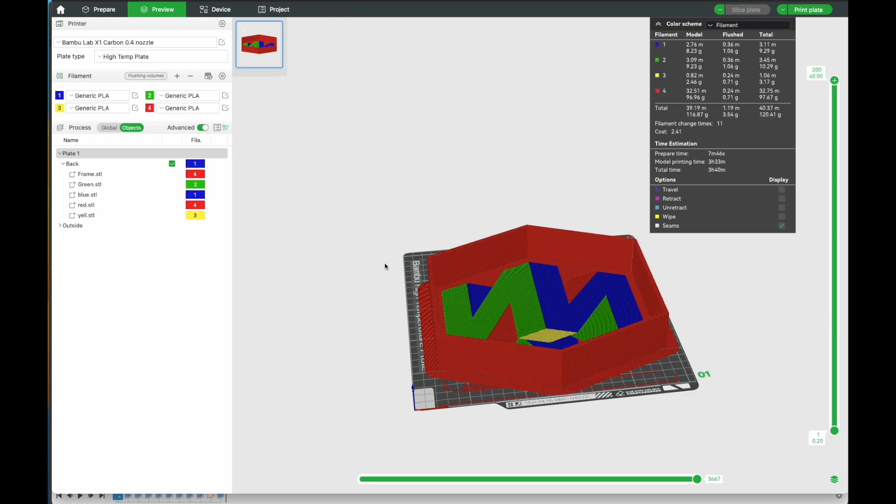The last piece here is to ensure that you get nice, clean prints on your first layer. A couple things you can do. One, go over to Quality, scroll down to where it says Wall Generator, and change this to Arachne. Arachne is a different wall slicing algorithm that tends to be really good about filling in small holes.

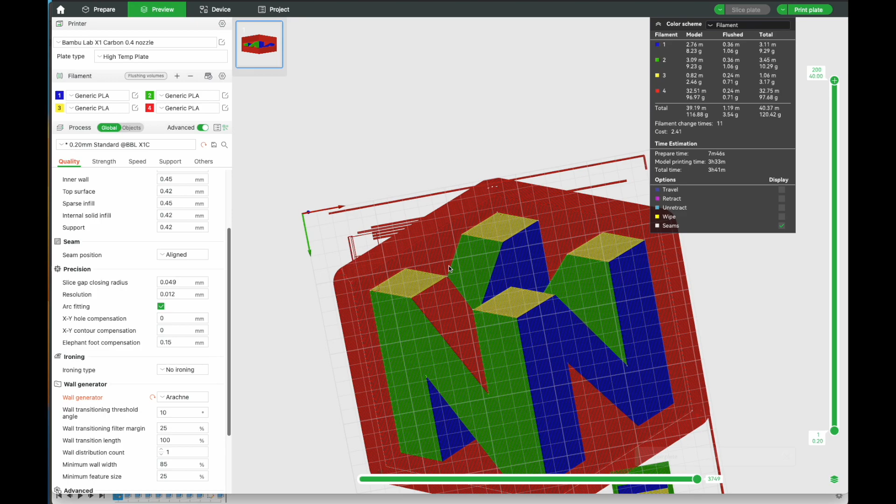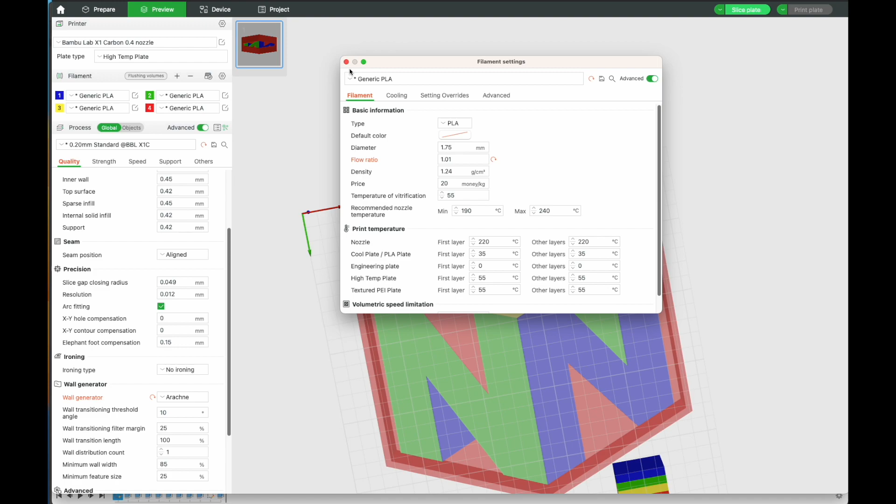Another thing you can do: go up and hit the edit button on your filament profile and change the flow ratio from 0.98. This is very subtle. You only need to change it a teeny bit, to like 1.01 or something like that. Try little steps at a time. I've used this exact value and gotten some really, really good results. And you would have to slice the plate again.

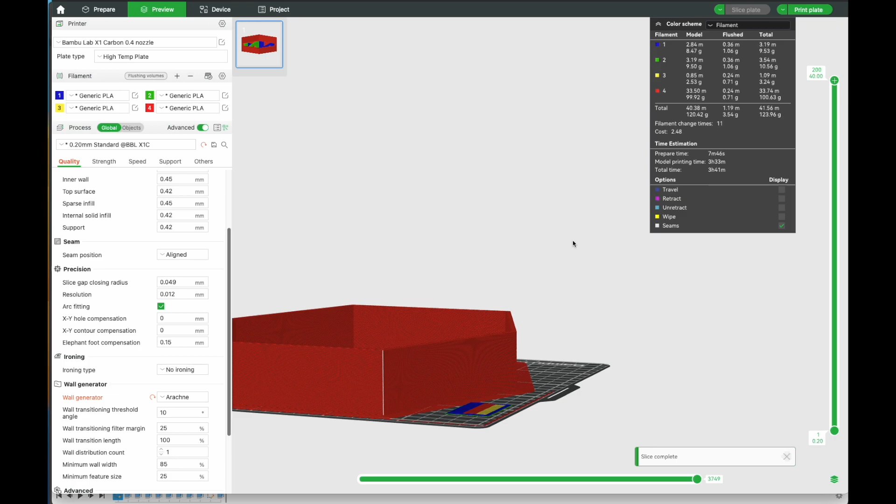And then obviously when you go to print, make sure that you're not doing what I'm doing. I don't know, why does it add a brim around the prime tower? I don't know, whatever. Anyways, there we have it, multicolor print. And hopefully you will experience a nice smooth first layer.

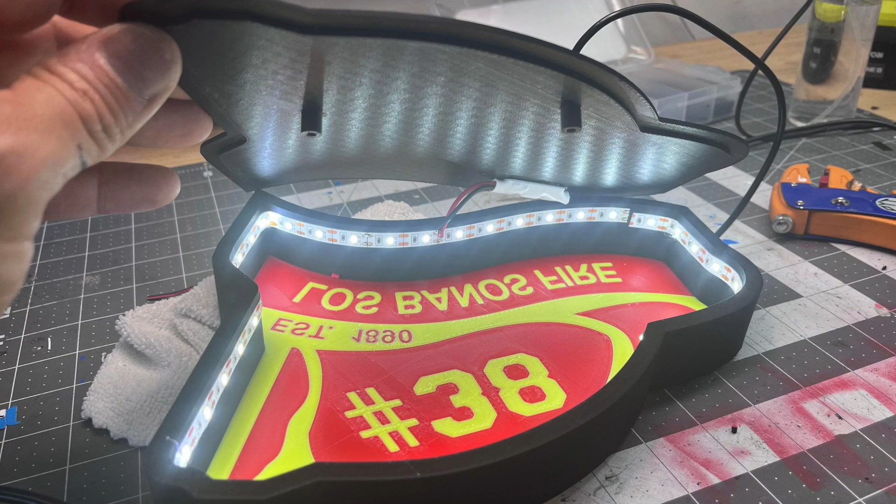Here's an example of how I go about doing the lighting. You can see that I try and get the LED strip as far to the back side as possible, but still leave a good 1 or 2 millimeter gap so that the back piece we're putting on the back side of our light will still fit in nicely and not collide with the LEDs. Additionally, I'm using a pretty affordable RF remote that you can get off Amazon.